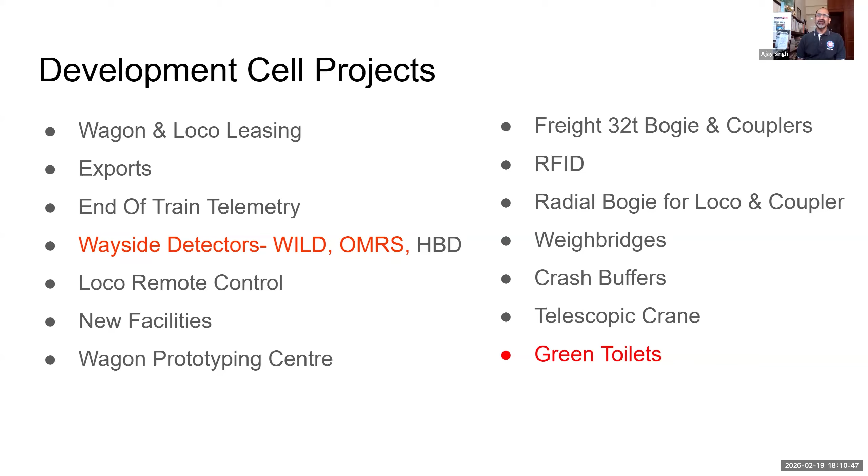So railways, we all know that we started on 16th April. Very soon we'll be completing 173 years of existence. The first train of 35-kilometer run was between Bombay and Thane. So it is, as Hari sir told, that we are almost handling the population of Australia every day.

And these are slightly dated figures of 2007. I have put them deliberately because that is the context in which we are talking about. By that time, we already had the largest fleet of passenger coaches in the world, more than 55,000. We were running over 7,000 passenger trains every day, which used to touch around 7,000 stations spread over the geography of the country. Now, it's very interesting that the train started in 1853, and by 1993, almost one and a half centuries had passed, but still our toilets were basically a hole in the floor. So we had very, very primitive toilets in the train, which were not acceptable by that time.

1993 is a very significant period in the history of railways and in my personal history also, because 1993 is the year when I actually joined railways as an assistant mechanical engineer. And 1993 is also important because that is the first time when railways put a toilet system which was not discharging human waste on the tracks.

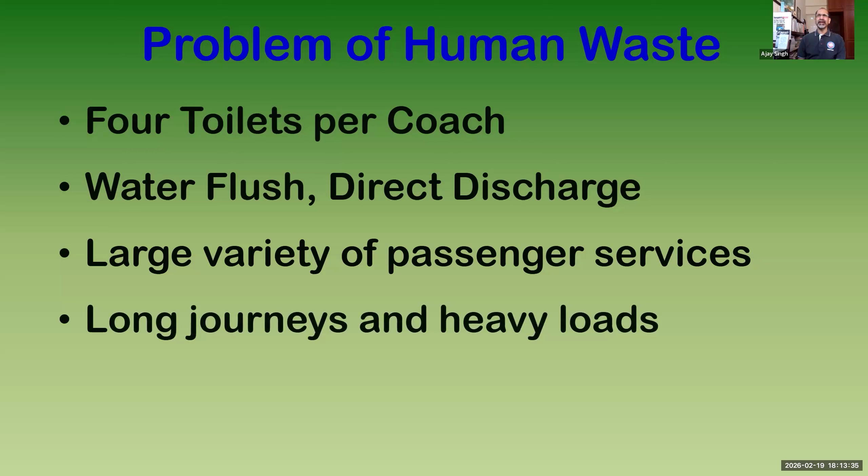In the Indian Railways context, the problem was humongous because we have four toilets per coach, and basically their water is used for flushing and it directly discharges on the tracks. We have a large variety of passenger services, and journeys are very long and heavy loads are there in terms of passengers. And there is a peculiar thing as far as toilet use is concerned on Indian Railways.

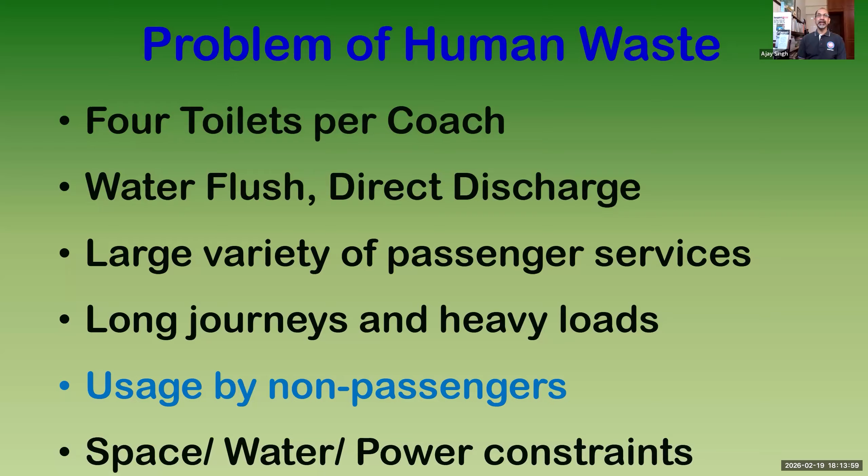The toilet is also used by non-passengers also. It's not only the passengers who use the toilet, even when the train is standing at the stations, many times non-passengers also use the toilets. Of course, the space and water and power constraints are there as engineering challenges. So these were some of the reasons because of which nobody seriously thought about putting toilets.

End result was that our stations used to have human waste lying on the track, because that is the place where trains will be standing and people will have a tendency to use the toilets when the train is standing. So we used to have this kind of situation, a very ugly situation, when human waste will be there on the track and a very bad stench will be coming.

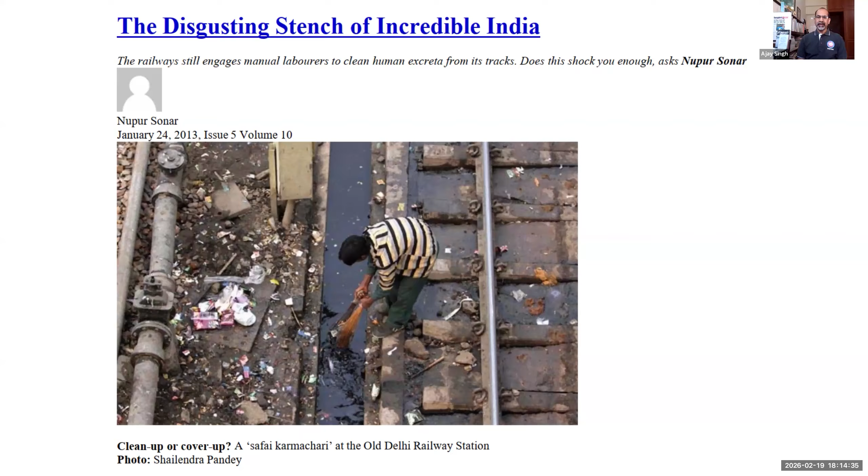So we started working, as I told, in 1993 on toilets which will not discharge human waste on the tracks. That was the prime objective. In June 1993, the Integral Coach Factory at Chennai put aerobic toilets in one of the coaches. In December 1993, a set of vacuum toilets was also tried, and another type of biotoilet by Integral Coach Factory was set up in 1995. In 1997, something called the macerated discharge system was tried out. But somehow none of these worked in the Indian Railways context.

There was lots of pressure on Indian Railways to stop direct discharge of human waste on tracks, especially on railway platforms. As a compromise, one technology called CDTS, Controlled Discharge Toilet System, was adopted in May 2005. In this system, below the toilet pan there was a small storage system where human waste would be stored and discharged after the train picked up around 30 kilometers of speed. There were speed sensors put for opening the bottom of the CDTS.

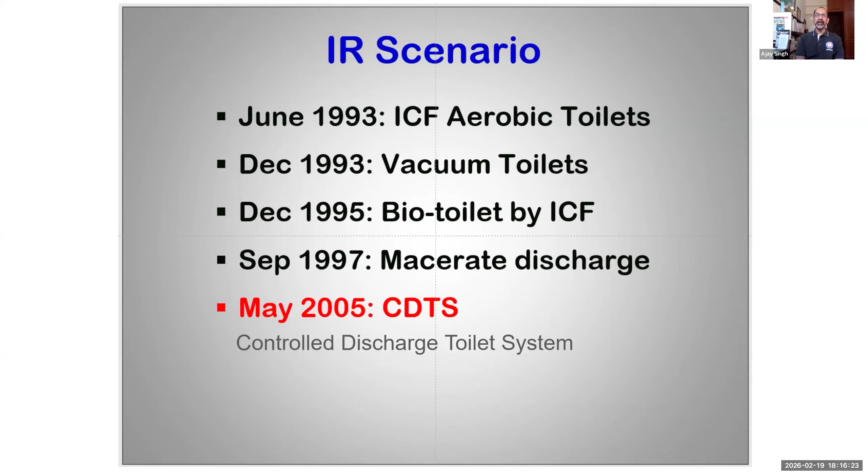Basically, the problem was shifted from the railway station to outside on the main track. This led to a peculiar situation because invariably the speed of 30 kilometers after the train starts from a station would be reached at a particular location. So that location used to have a huge dump of human waste, creating associated problems of maintenance.

By 2007, 8 and 9, lots of pressure was on railways to work out a solution because many stakeholders got after railways - the public of course, courts were also giving strictures, media was there, parliament questions were being asked, and bodies like the Commission for Safai Karamchari, Minister of Rural Development, Drinking Water and Sanitation, Social Justice and Employment, Housing and Urban Poverty Alleviation, Cabinet - even our own staff were demanding that the situation should be improved.

What used to happen was that human waste would fall on the tracks and get splattered on the components below the sill, below the chassis portion of the coach. So people who used to go to maintain the brake system, suspension, and other things faced lots of difficulties.

In fact, many of you are aware of Bezwada Wilson. He played a key role in this development because he filed a court case which was not specifically for railways - it was a pan-India court case on elimination of manual scavenging. In that, railway was also made a party because railway human waste was being discharged on track and then cleaned manually.

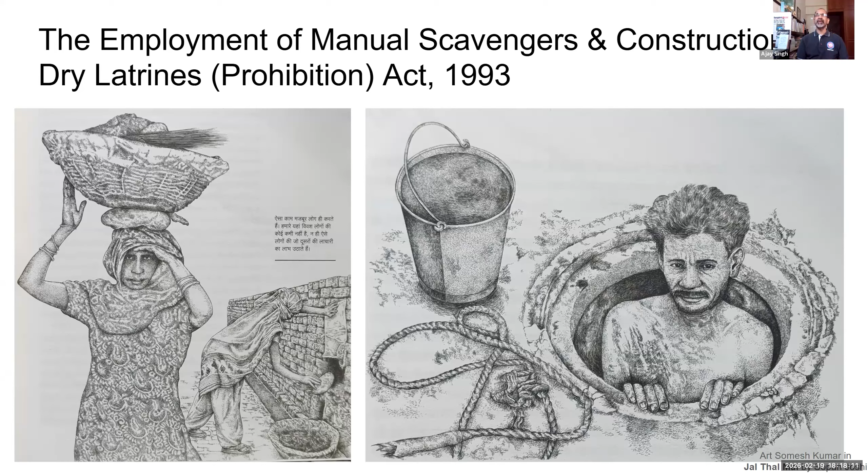There was a writ petition in the Supreme Court by his organization called Safai Karamchari Andolan versus Union of India. In that, railway was also made a party, and in 2004 railways made a statement that we are going to concretize the platform tracks at stations so that human cleaning can be avoided and cleaning can be mechanized. This was taken up as a very high priority item.

A tremendous number of railway stations were converted from the normal ballasted track to a concretized track, and water jets and other things were used to mechanize the cleaning.

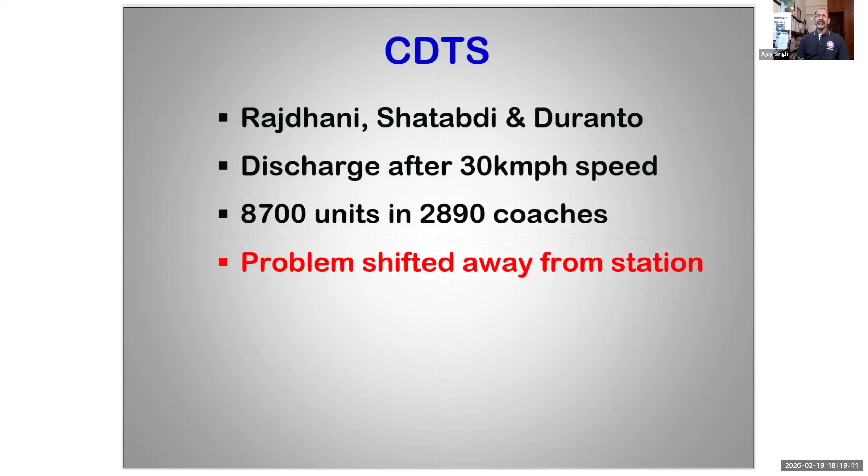As we talked about CDTS, the Controlled Discharge Toilet System, it was initially put in Rajdhani, Shatabdi and Duronto trains, with discharge after 30 kmph speed. The problem was basically shifted away from the station. So we kept working to find a solution which could eliminate the discharge of human waste on the tracks entirely. That was the prime consideration in developing biotoilets.

From 2004 onwards, there were several parallel attempts made. There was a joint program with IIT Kanpur with Professor Tare for a zero discharge toilet system. Then DRDO, who by that time had already developed bio toilets, were giving licenses to people. And of course, we were also trying out aerobic bacterial decomposition.

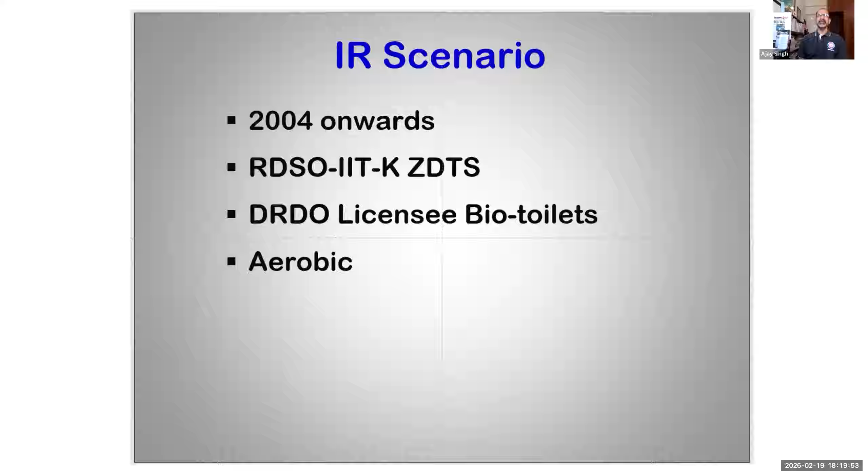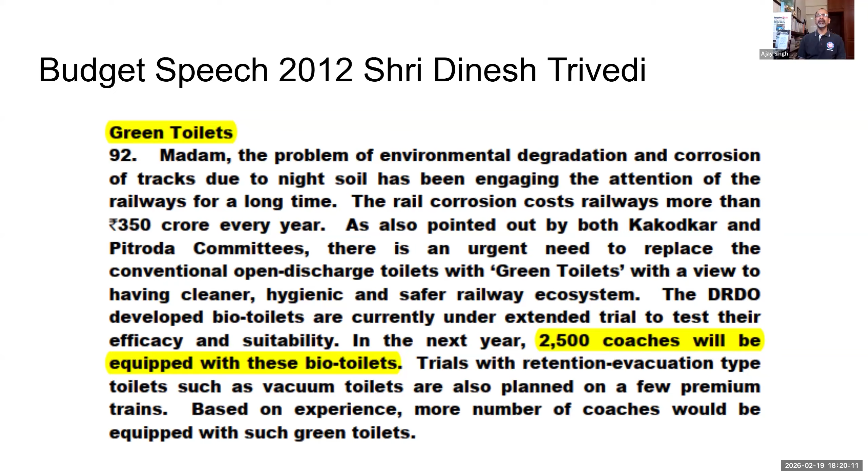It was so important that it figured in the budget speeches of 2008, 2009, 2010, and 2012. Various railway ministers covered in their budget speeches that biotoilets were going to be installed - they were a priority of the railways.

Up to 2013, Mr. Pawan Bansal was the minister, and he also covered this in his speech. In fact, there was interministerial pressure also - Mr. C.P. Joshi, who was the Minister of Rural Development and Panchayati Raj, wrote to Mamata Banerjee ma'am, who was the Minister for Railways in 2009.

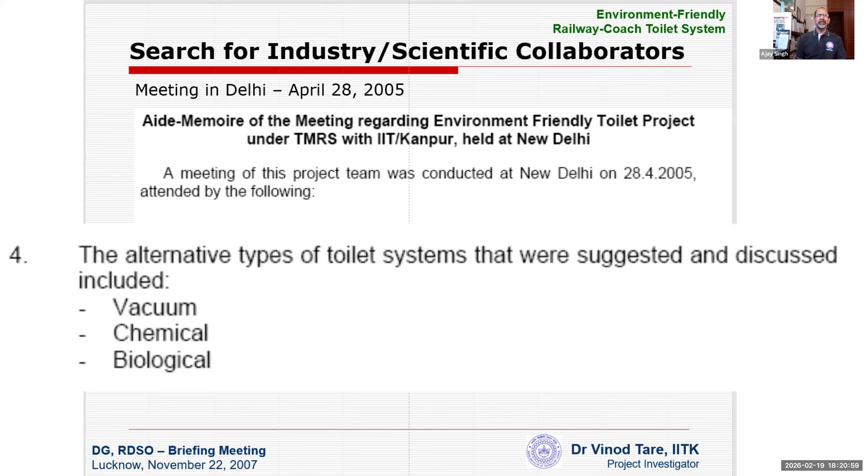So Railways was making tremendous efforts to find a solution, but in the Indian context, the solutions were not working very well. The IIT Kanpur solution also did not work out - they suggested vacuum technology, chemical technology, and biological degradation, but none of these were working.

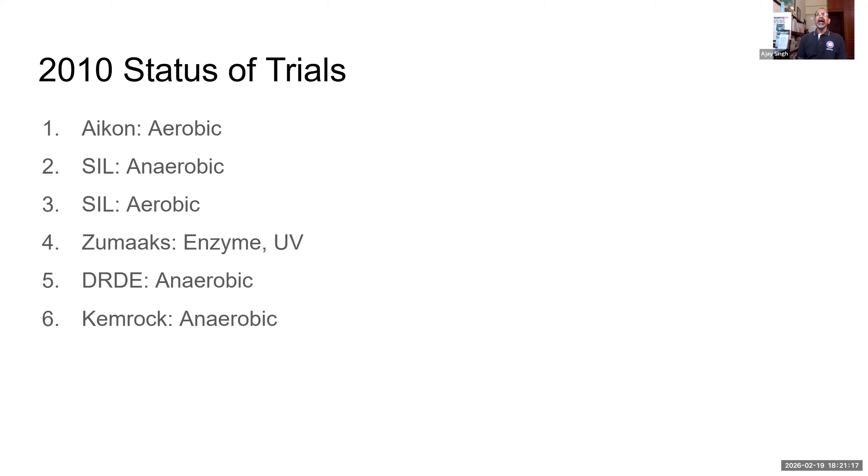So as of 2010, six technologies were simultaneously being tried out in different trains. Some were aerobic, anaerobic, some were enzyme-based decomposition followed by UV, and there were plans to go for vacuum toilets also and other techniques.

Vacuum toilets were an interesting thing we could never go ahead with, because human waste is collected in tanks below the coaches, and ultimately you have to evacuate it. We looked for technology partners, but evacuation can only be done at the end. We took out a train between Bhavnagar and Bombay, and when we talked to the municipality about evacuating the full train's human waste into their system, the municipality refused permission. So these vacuum toilet trials were abandoned because we didn't have facility to handle the complete human waste of a full train.

Many foreign parties came and started offering their solutions, but there was a problem. We are a country of washers versus wipers, and we have longer journeys. Frequency of toilet use is also higher in the Indian context, we have higher number of passengers, and our food contains more roughage. The biggest problem we kept struggling with for years was that our toilets were treated as garbage, so anybody and everybody would try to put whatever they felt like.

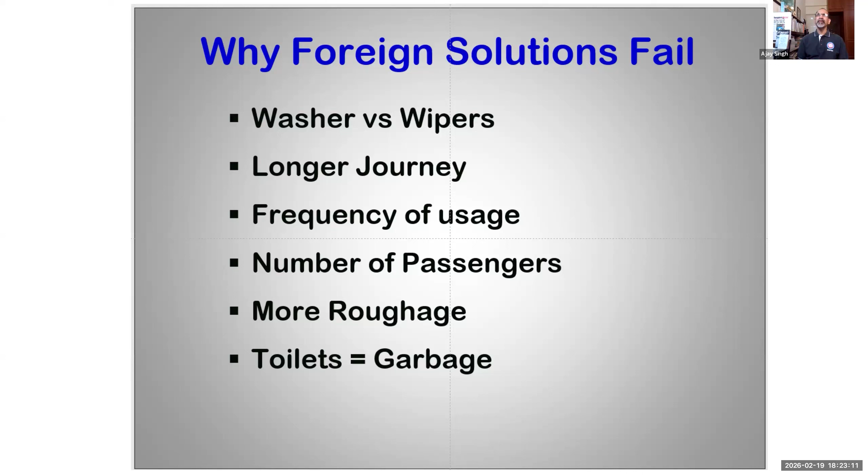But during these trials, we found that the DRDO toilet works and is the best solution. The best part was that it was totally indigenous. The technology was developed by DRDO for Siachen use, and we worked on an MOU with the Ministry of Defense.

We found that deployment was a problem because we were trying to force DRDO to do the engineering part as well as the deployment. Railways is very good at engineering and deployment, while DRDO's life sciences division at Gwalior is very good in the life sciences part. So there was a eureka moment when in the ministry we decided that we'll split the work, letting DRDO focus on the bio part and railways focus on the engineering, because the engineering is very complicated - in such a small space you have to put a tank, and there are four tanks on a coach. We focused on engineering, and tremendous work was done by the Rail Coach Factory at Kapurthala, and then this clicked and we started working.

We started with the MOU with DRDO for joint technology development, signed in March 2010. Design and development was through a joint working group, and IPR was jointly owned. In fact, afterwards railways made it an open source kind of thing - the whole design of the tanks and everything was given to people, so anybody can make biotanks as per that design and supply to us.

I'm happy that Kamboj sir has joined here; he was part of the joint working group along with me. We used to have quarterly meetings with the railway, different operational units, and everybody, so that the development would go in a smoother manner. There were lots of initial problems, and we used to sit down and sort them out.

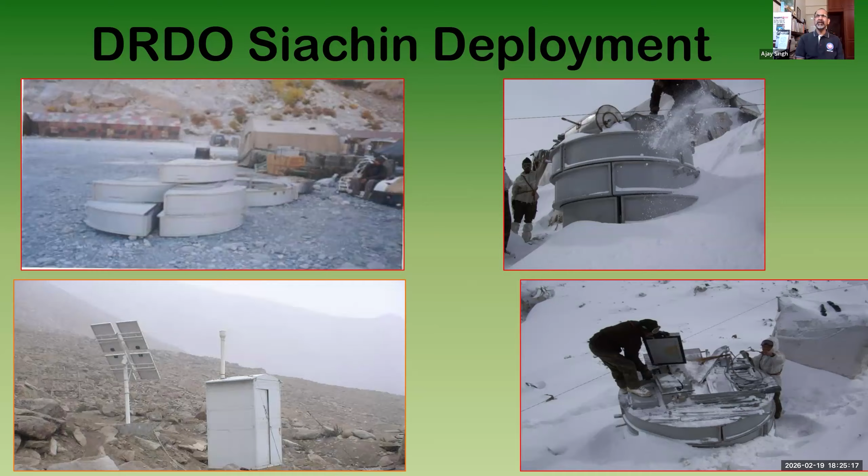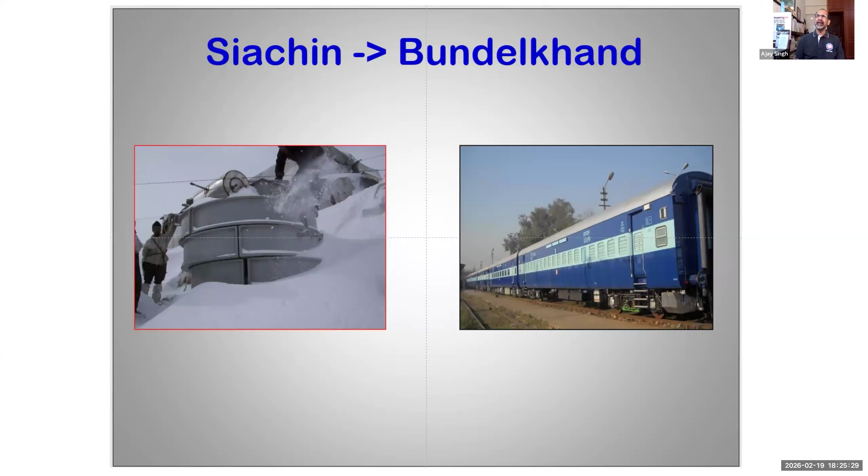DRDO developed these biotoilets for Siachen deployment. Dr. Lokendra Singh was the scientist associated with this project; I had requested him to join, but he's retired since then and wasn't able to. A special bacteria was brought from Antarctica to ensure low temperature survivability of the bacteria, and a special inoculum was devised. The very same inoculum was taken to the Bundelkhand Express, which was the first train we intensively monitored for deployment of DRDO biotoilets.

The working principle of the inoculum is that it's an anaerobic process with multiple chambers. Human waste comes into the first chamber and overflows into various chambers, so there's sufficient time for all the waste to decompose. At the end, we get clear water rich in nutrients. Being an anaerobic process, sludge formation was minimal and hardly any scum was there. There was also a venting pipe for the gas, because methane gas would be formed during this process.

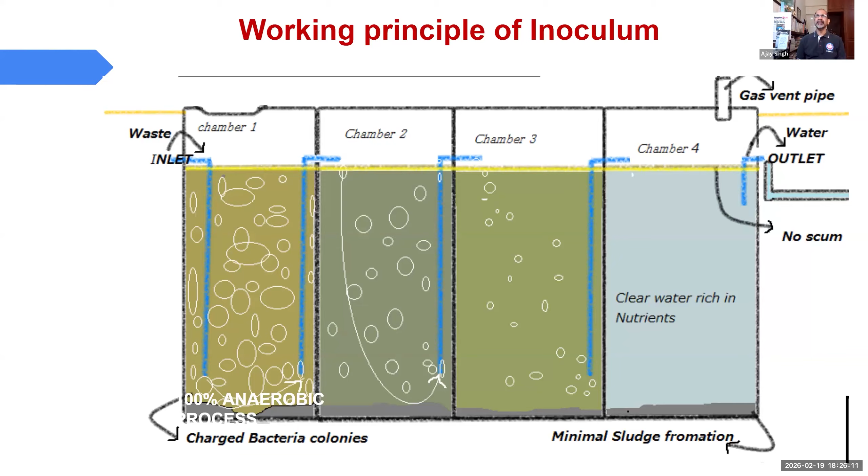This is in very short how the anaerobic system works: human waste is acted upon by anaerobic bacteria, and CO2 plus methane gases are released to the atmosphere. The liquid waste undergoes a bit of chlorination so that disinfected liquid is discharged outside on the railway track. The system does not require oxygen and also does not require regular cleaning.

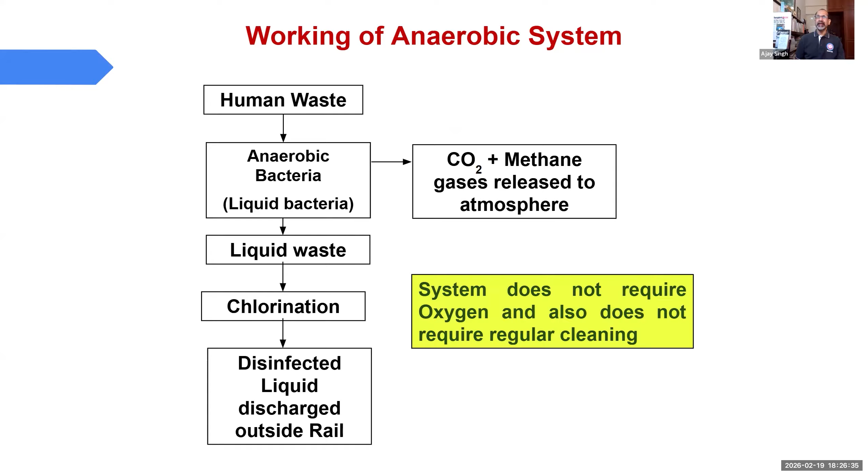No electricity, no pumping, nothing is involved here. This is the 3D CAD drawing of the coach where it is fitted.

In railways, we have two types of coaches. One is the older generation ICF coaches - this is a picture from ICF coaches. In LHB coaches, the newer design, it was a huge engineering challenge because of the peculiar space not being available. Here you see the biotanks are fitted just ahead of the wheels, so it's a very difficult position.

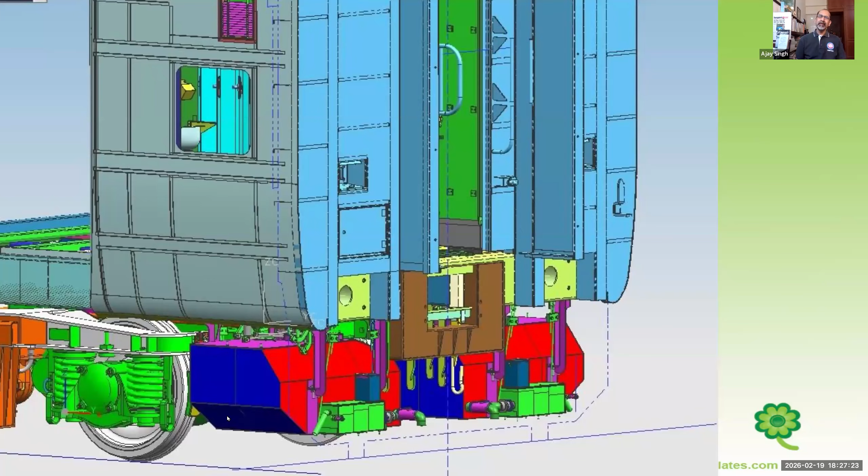Each tank weighs almost half a ton, so a total weight penalty of almost 2 tons is added to a coach, which also impacts the suspension. So the engineering problems were simultaneously being solved along with the development of this.

This is one of the designs which we started scaling up, because this design was basically effective. It was comprising four chambers, and then the outlet pipe was going through a chamber where we can chlorinate it with chlorine tablets.

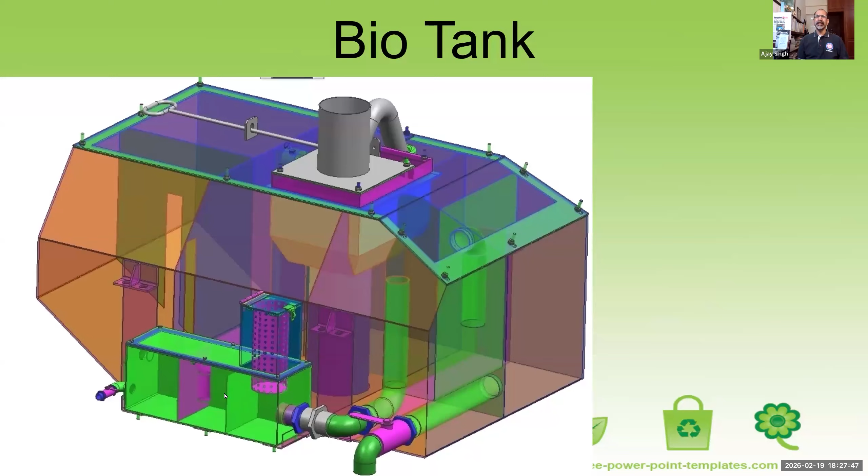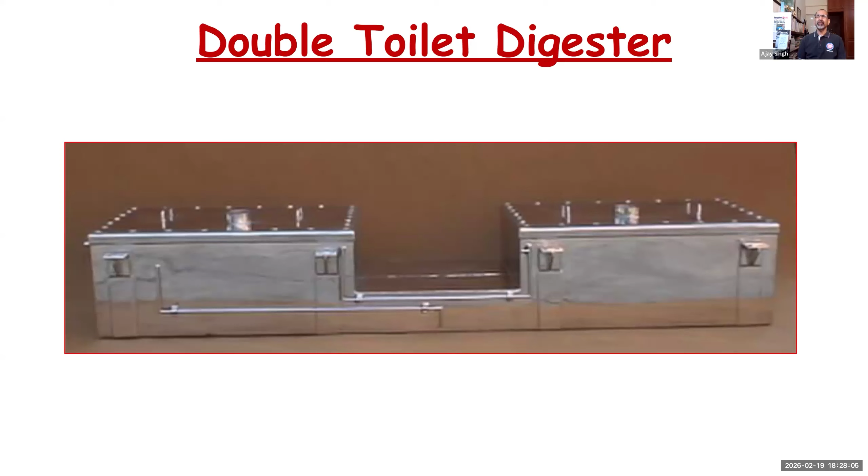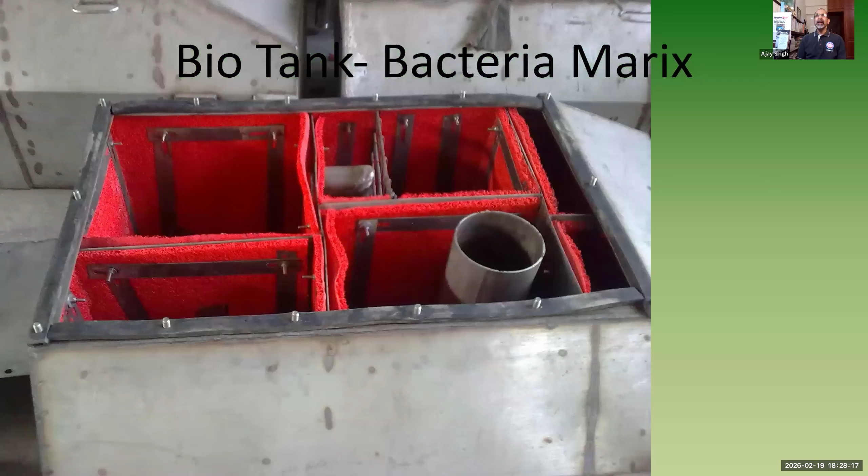The DRDO biotoilets went through several design iterations, and I think it was the fifth design which was taken up for scaling up. This is the initial one when a double toilet tank was made. Then this is single, and finally we kept on improving to reduce weight also, and making sure it is safe to run. This is the final design which we started deploying rapidly.

One feature of this was a very simple matrix built in inside, so that the bacteria will survive and can also survive any kind of shock loading, because sometimes the cleaning agents used in the toilet on top of the coach might be used excessively or might be harmful for the bacteria. So the bacteria in the solution in the water might die, but the bacteria deeply embedded into this matrix used to revive and get back into action.

Later on, almost simultaneously, we switched to non-chemical based cleaning agents, which were organic cleaning agents. This is a coach fitted with biotanks - you can see at the end of the coach the tanks are there. There are total four tanks in each coach.

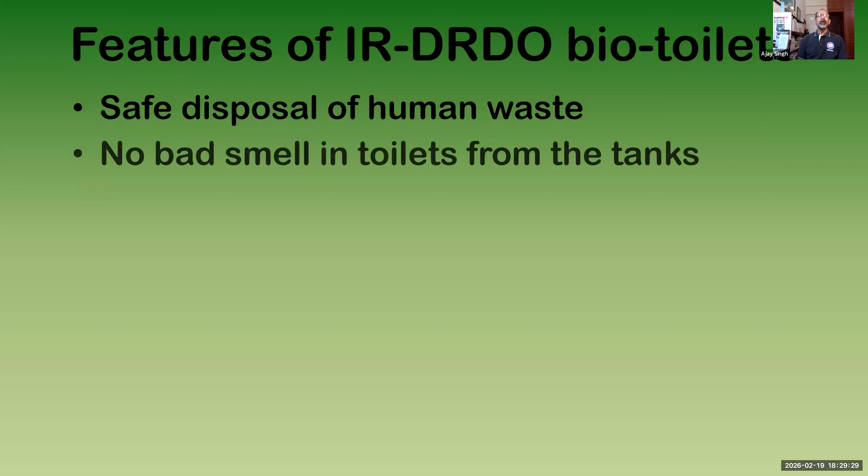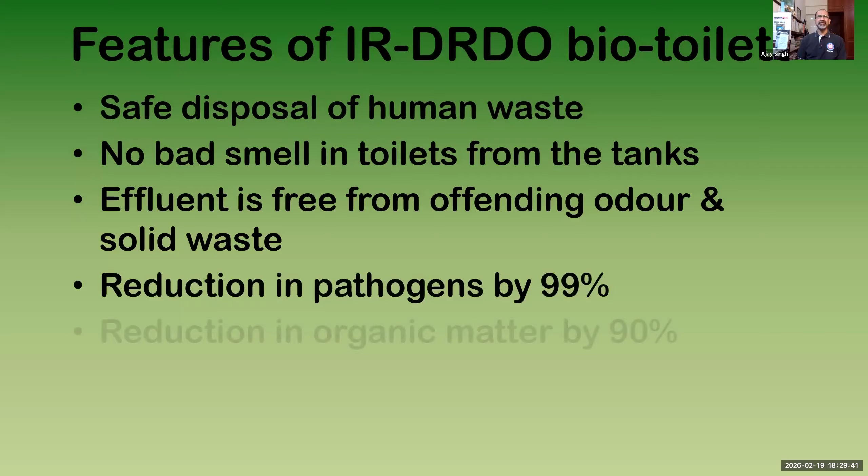Basically it helped us in safe disposal of human waste. We stopped dropping human waste on the tracks. No bad smell was there in the toilet from the tanks, and effluent is free from offending odor and solid waste. Reduction of pathogens by 99% after chlorination was achieved, and the reduction in organic matter was by almost 90%.

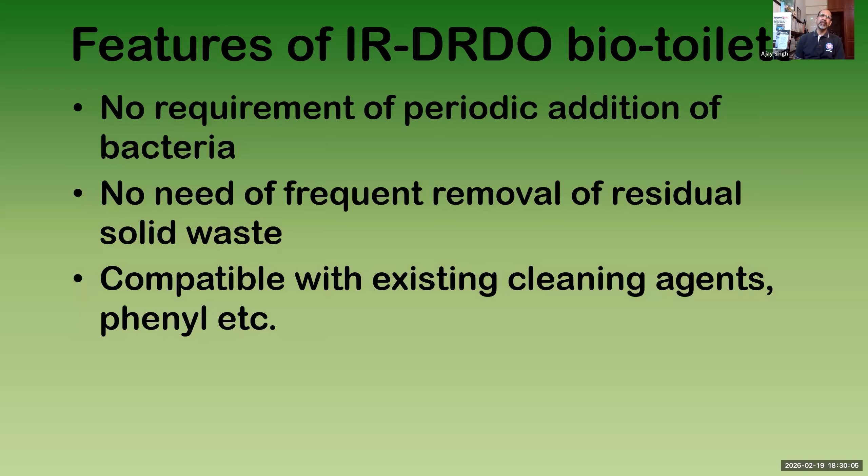No requirement of periodic addition of bacteria was there because the colony of bacteria became self-sustaining, and no need of frequent removal of residual solid waste was also there. It was compatible with existing cleaning agents, phenyl etc. But afterwards we moved to bioenzyme kind of things, and bacteria and effluent both were non-toxic.

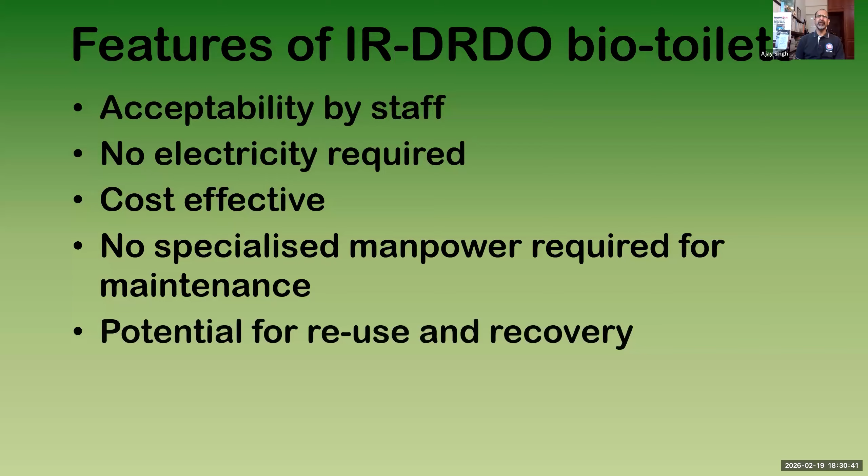Acceptability by staff was there. Staff were very happy because human waste was no longer coming down on various components. No electricity was required, it was very cost effective. The technology we were trying to get from outside and implement was minimum almost 4 to 10 times the cost of what we developed, and no specialized manpower was required for maintenance. There was potential for reuse and recovery of the inoculum as well as the tank, and the operations and maintenance cost was very negligible.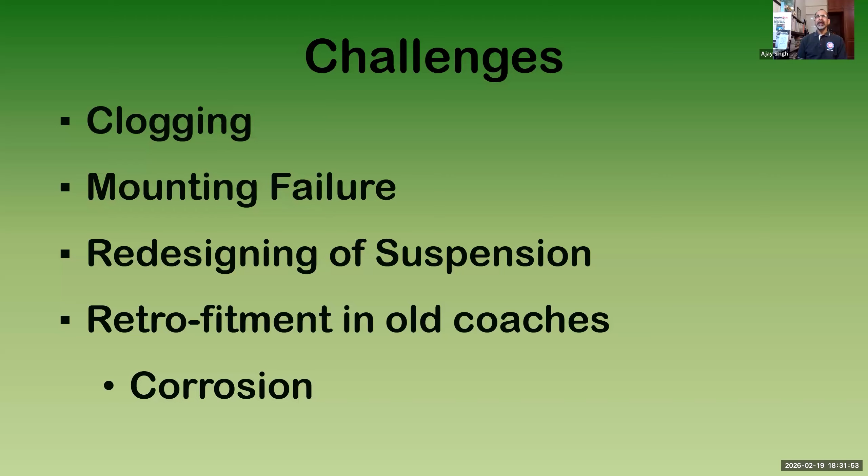In case of AC coaches, there was an issue of redesigning the suspension also. The biggest problem was retrofitment in old coaches. We started fitting all the new coaches coming out of various railway factories, but how to put it in the old coaches? That was a challenge, because in the older coaches there was an issue of corrosion, and also an issue of overhead welding of the safety brackets, and that was the reason why we could not increase our deployment during initial stages.

Clogging was caused by various issues like polythene, napkins, and bottle pouches. For example, in the Bundelkhand Express between April and July 2012, there were 255 instances across 31 coaches where toilets got clogged and could not be used. On average, two coaches per trip were impacted because of this.

So we improved the situation by making sure dustbins were provided, and we started educating people as well. These kinds of stickers were put up, which you might have noticed when traveling in different trains nowadays, for passenger education. Even then, people do throw unwanted things.

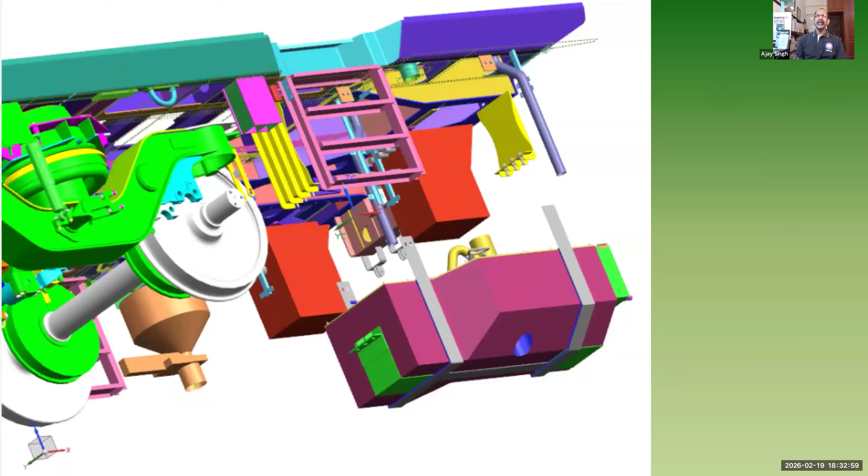The joint working group was basically under the leadership of the Chief Design Engineer at Rail Coach Factory. It had DRDO scientists and Indian Railways engineers as well. This is the design for the LHB coach. It was very challenging because there was hardly any space, so it wasn't a regular shape. It became a very complicated shape, and fitment was also very complicated.

But we kept introducing biotoilets. We focused specifically on the DRDO biotoilet and stopped using other technologies, scaling up deployment. It started in 2010-11 with one train, then three, then four. By 2012-13, we had targeted putting in 2,500 coaches.

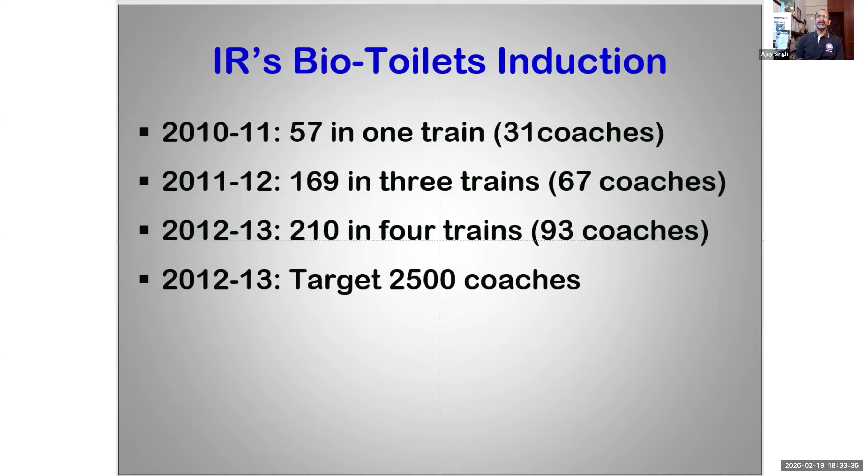In fact, in the minister's budget speech of February 2012, it was announced that DRDO-developed biotoilets would be under extended trial, and by the next year, 2,500 coaches would be equipped with biotoilets. Please understand, railways at that time had almost 55,000 to 60,000 coaches running, and we were only trying to implement biotoilets in 2,500 of them initially.

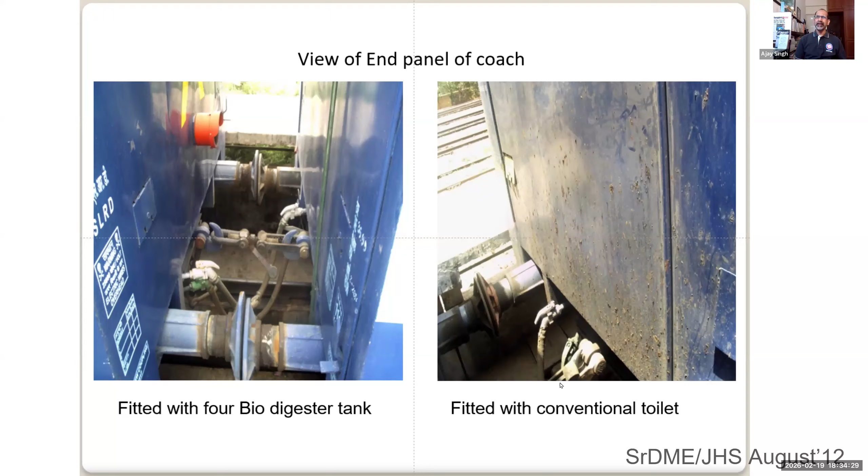This is the improvement that was brought in. You can see the coaches fitted with biodigester tanks hardly had any human waste coming onto the end walls. This used to be the earlier condition - conventional toilets used to have end walls splattered with human waste, and the components under the chassis used to get impacted as well.

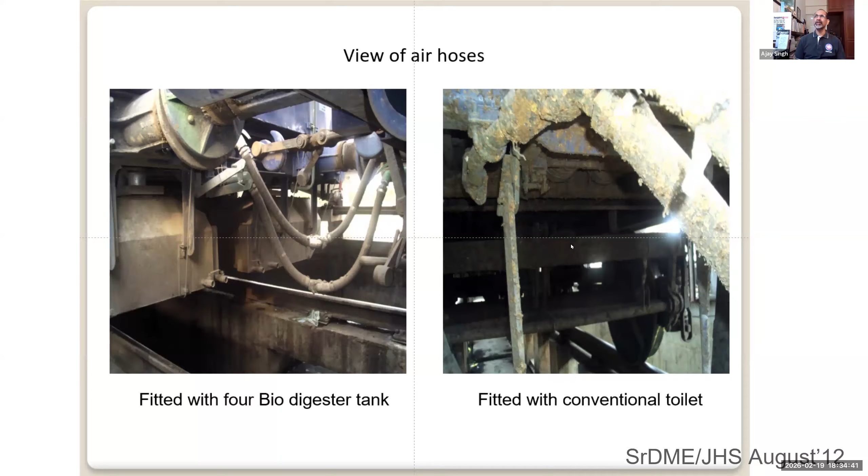These are some of the air hoses fitted with digesters, and these are without digesters. You can see how much human waste used to come through.

Simultaneously, we were fighting a court case in the Supreme Court regarding manual scavenging. In 2011, a joint secretary level committee was formed to address this issue, and in Delhi, this railway portion was transferred from the Supreme Court to the Delhi High Court. On 10th October 2012, a very important hearing took place, in which we informed the Delhi High Court that we would convert all Indian Railways coaches by 2021 through fitment of biotoilets.

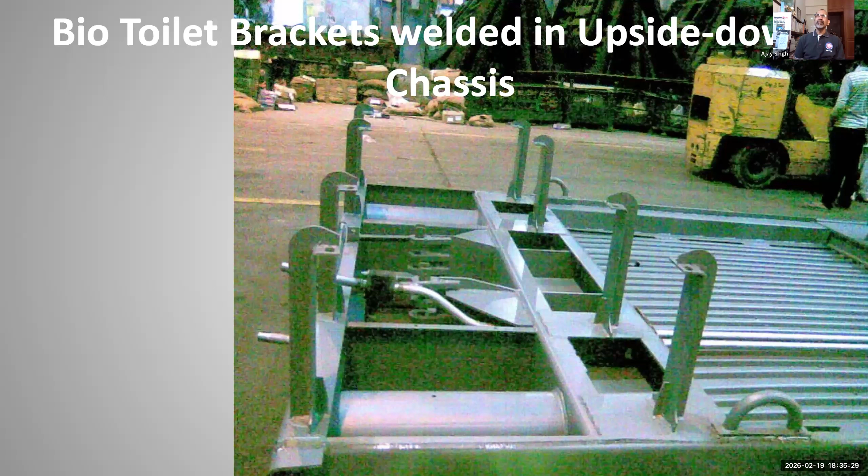The problem was with fitting the older coaches, because when we do the safety bracket mounting welding in coaches, we normally do it in an upside-down condition. But we devised ways to fit biotoilets in the older coaches too. By 2012-13, we already had biotoilets running in about 9 to 10 trains, traversing all across the country.

In fact, around 2013, we realized our deployment strategy wasn't correct, because in typical railway engineering fashion, we were only chasing the number of toilets installed. But then we decided that if the deployment remained dispersed, we would never know if it was making a real impact on the ground.

So we decided to take a sector-by-sector approach and introduce biotoilets in all trains of that sector. We chose the Delhi to Jammu Tawi sector first and completely converted all trains on that sector to biotoilets, and it did make an impact - we saw that Jammu Tawi station and other stations on that route stopped having human waste on the tracks.

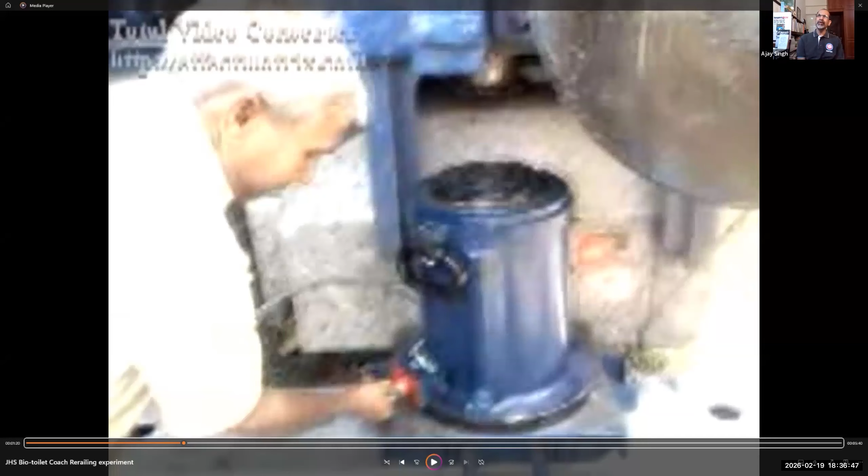There were several other challenges too. There's a screen grab, not very clear, from a video where we did a trial regarding how to perform accident restoration in case of a derailment of a coach fitted with a biotank. How can you even place the heavy hydraulic jacks needed to put the train back on track? So these kinds of engineering challenges existed, and scaling up was a problem.

So we developed a lot of vendors, because these tanks were lightweight, made of special 302 steel, and welding was very critical. We insisted that only laser welding be done on these tanks so they would always be safe, and we couldn't have an unsafe situation where a biotank fell down onto the track causing a derailment.

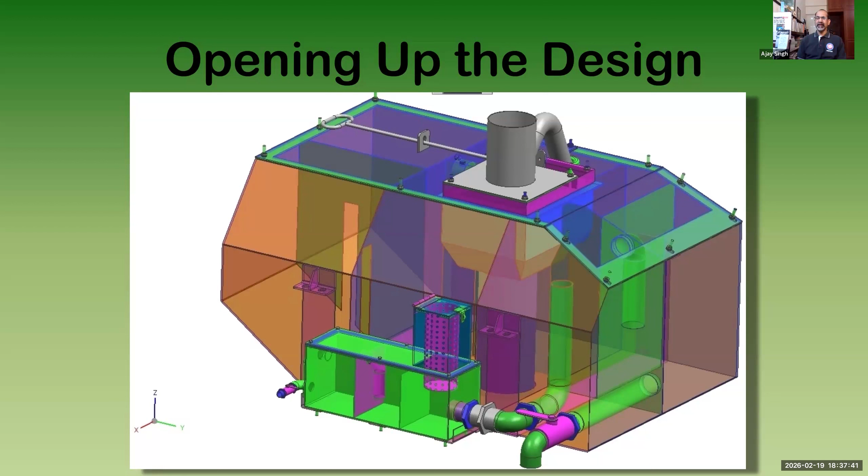We opened up our design and gave it to everybody - drawings, manufacturing drawings, everything - so that they could ramp up the production.

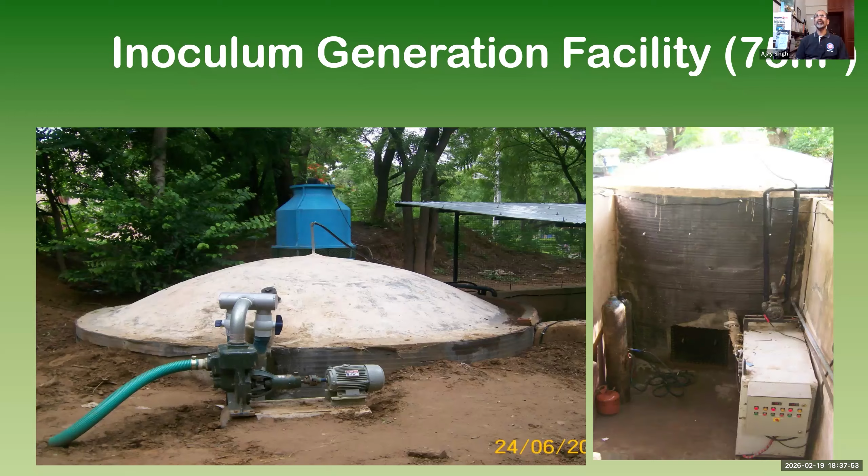We found that bacteria was becoming a constraint, so we started making our own bacteria with the help of DRDO. We set up an inoculum generation facility. In fact, this drawing, Kamboj, I dug out this drawing - it is signed by you, Mr. D.V. Kamboj, as a scientist from DRDO. He signed this drawing in 2012. This was given to us for generating the bacteria, and we used to get the mother inoculum from DRDE lab, Life Sciences lab in Gwalior, and we started making our own bacteria so that we could scale up the deployment in a very fast manner.

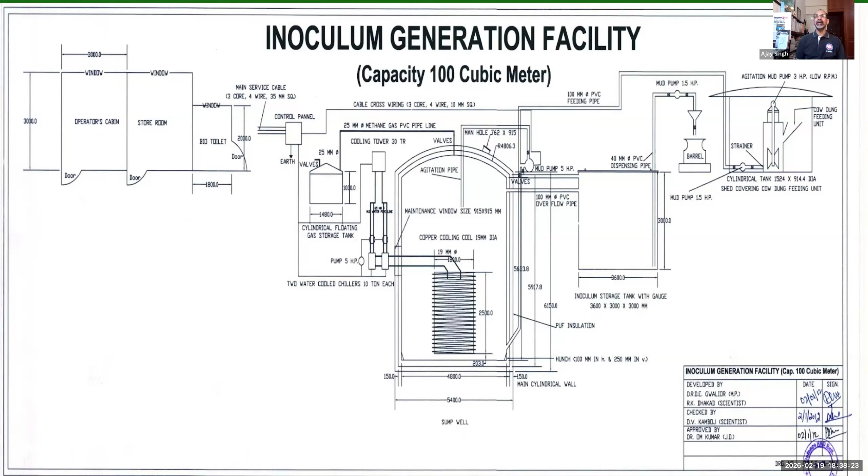Another challenge we found was that there were no effluent norms. When we went to CPCB, they simply raised their hands and said, 'We don't have anything, you make your own norms.' So we started making our own norms based on the samples we were getting. But it was a challenge.

We tried many permutations and combinations, and of course we were not sanitation engineers or sanitation scientists, so there were many problems. Initially, naturally, we started taking the STP output norms and adopting them. But very soon we realized we cannot be an STP - you cannot, with a small tank running at 100-120 kmph in a train, do STP level treatment.

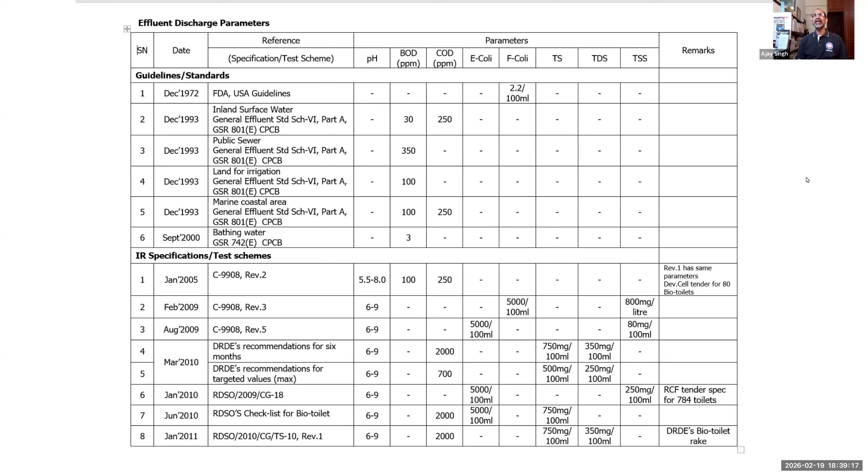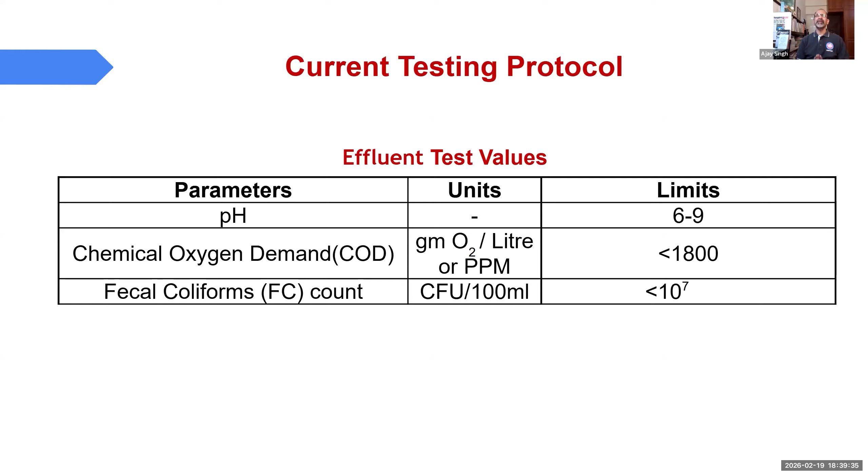So we focused on norms that would meet our basic requirement that human waste should not fall. Finally, the effluent norms evolved, and currently we only check pH, COD, and fecal coliform. These three parameters only are being monitored.

During that period, because of lots of commercial interest, people were trying to shoot down this IR-DRDO project, raising all kinds of bogeys. One was that methane is produced in anaerobic decomposition of human waste, so there would be fire in the coaches. This was tested and put to rest. Once again, Kamboj sir signed and issued a letter stating that the flow rate of biogas is much lesser than what could create any problem.

Then this issue came up: what happens if the discharge goes to the river? Interestingly, when I did a study, I found that Indian rivers all have much worse water quality than what we were discharging.

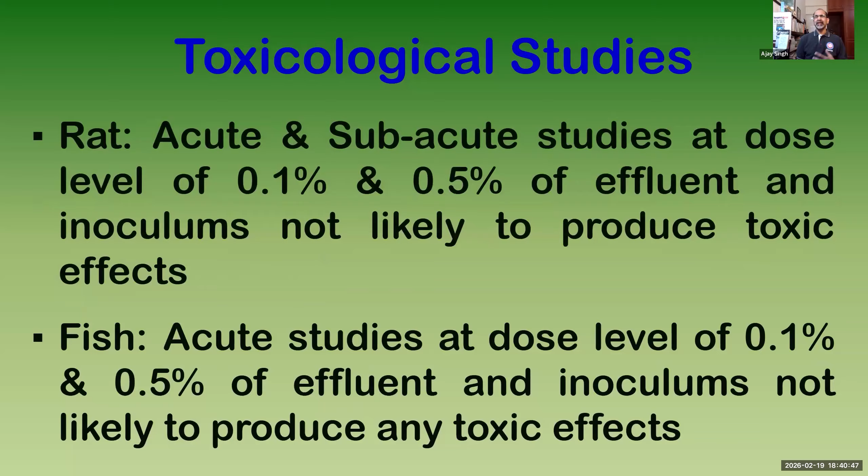But even so, we conducted toxicology studies through DRDO, done as per OECD norms, test guidelines, and FDA good lab practices, and found that in both terrestrial and aquatic fauna, it is not toxic. Whatever discharge, bacteria, or effluent was there, they did not have any toxic effects.

So on 19th November 2012, simultaneously, this court intervention was also going on, and an affidavit was filed - in fact personally signed by me. We committed that by 2021-22 we would completely switch over to biotoilets and there would be no human waste discharge on tracks. This is one of the things where railways has been able to meet its commitment to the court and to the nation, where we completely eliminated human waste discharge by 2021-22.

It's a very interesting thing - the gentleman who used to call Indian Railways the biggest open toilet in the world, afterwards we started interacting with him. I was going and interacting with him, and myself along with Dr. Lokendra Singh, we were trying to guide Jairam Ramesh sir on the open defecation free problems, on how to fit toilets in rural areas and other things. So the whole thing has come full circle.

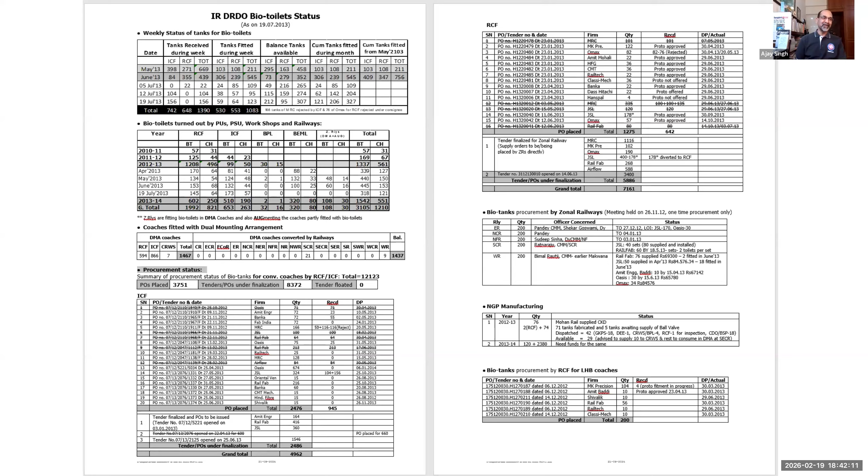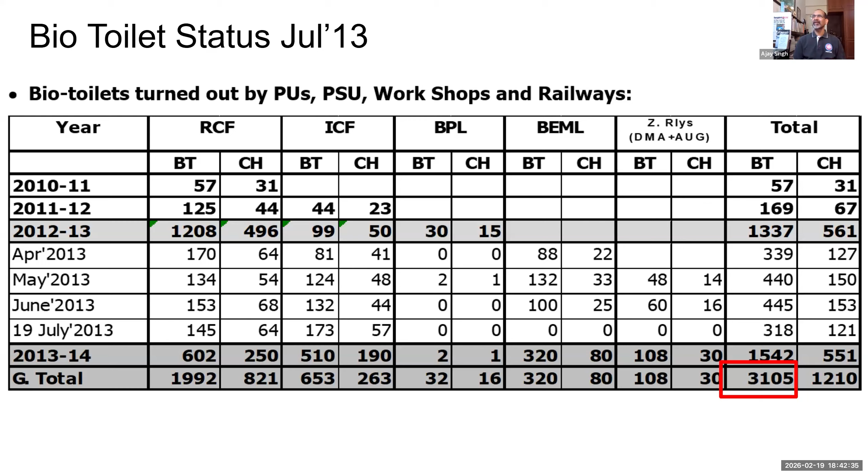By 2013, this is my monitoring sheet with which we used to track the deployment. By July 2013, when I finally left the ministry, we had already completed 3,100 installations of biotoilets. This was very critical, and I was very particular about this number because there was so much competition and backstabbing going on due to commercial interests. We realized that if we deployed 2,500 biotanks, after that it would not be possible to roll it back - and that's what happened.

Simultaneously, in the courts, the Manual Scavenging Act was modified, and in 2013 railways also officially became party to that. By that time, this problem was already being addressed, and currently we don't have any human waste directly dropping on the tracks.

As of December 2025, my colleague from the ministry has shared data with me. There are deployments of more than 3 lakh bio toilets in more than 1 lakh coaches. The current population of coaches on Indian Railways is, I think, 70,000 plus. So we have deployed in many more coaches because many of the coaches have gone end of their life and been taken off.

On railway tracks earlier, we have stopped this phenomenon of something called golden shower. People who are older will remember that whenever a train used to pass over a bridge, nobody would cross under it because human waste was likely to fall on you. But nowadays it's no longer there. There is an overflow, and because of that, a little discharge of effluent happens, but it is not harmful in any manner. So bio toilets have been a very, very significant development for the railways, for the nation.

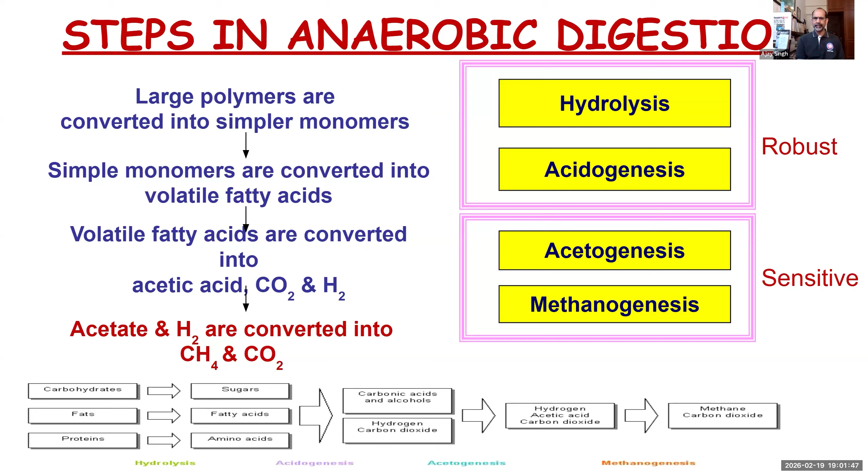Absolutely, over to you Raval sir. Can we bring down everybody on the screen so that we can discuss? Ajay sir, just stop sharing, stop sharing. Okay, I'm slightly technologically challenged.